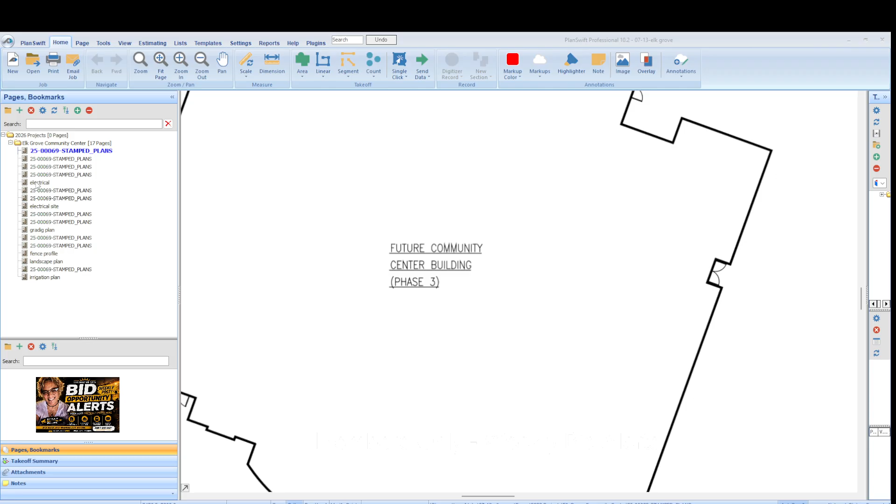So let's transfer over. This is a future community center building, but it's primarily civil work. And so this is a good one, it's very good. So let's look through the sheets that we have.

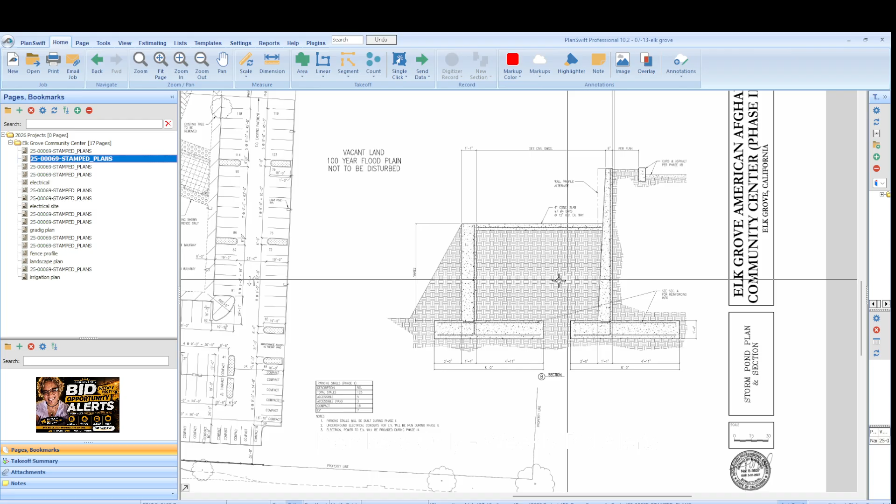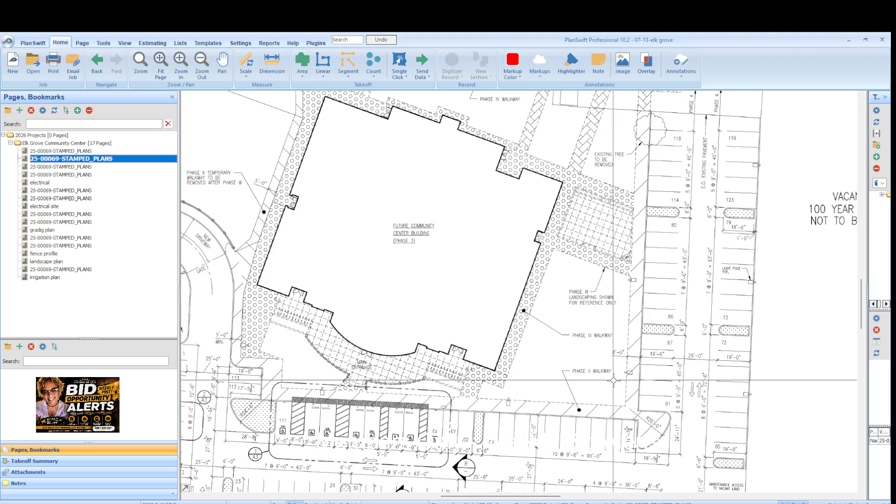So let's take a look at what we have, and this is the site plan. This is going to be new, and what it's showing us is landscape, the walkway, all of the general stuff. If we wanted to, we could do some square footage, some measuring of the lines and the symbols, because each one of these gives man-hour totals, how many letters are there, and it's a man-hour total per letter per symbol.

And what do we have here? Oh, storm pond, that's interesting. So we're going to look at those section views of the pond, which most likely will give us the depth, so we'll know how much to excavate out of that. So that'll be a nice one.

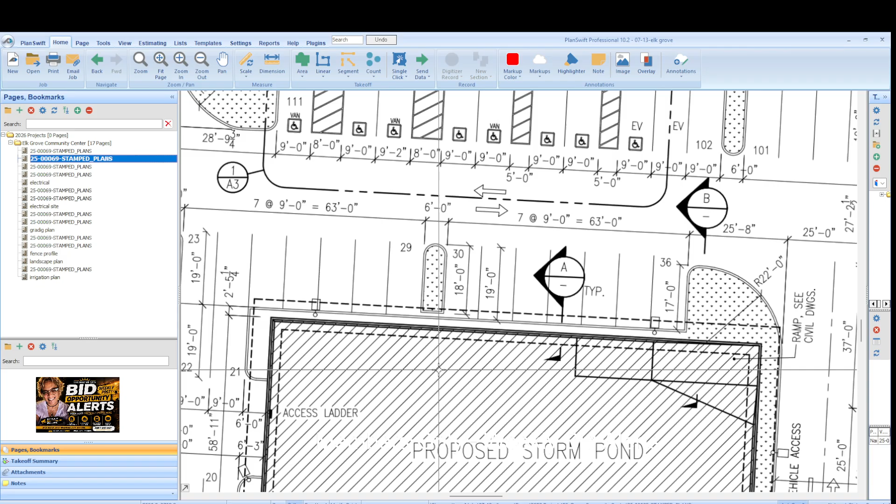If you are a third tier member, you get the full estimate. So again, this is a new portion of a Afghan community center that they're building. We don't have any of the interior, we're just doing basically the civil work, so just giving you some details.

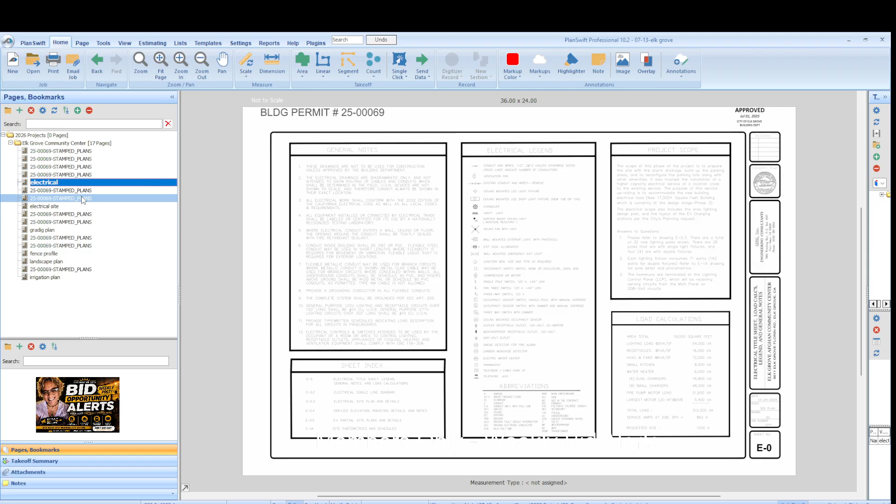And here's the electrical set for the exterior, which I think is really good for an electrician to look at and study. So they're showing us the trench details - this is where our wire is going to go. So yeah, this is a good one, giving us all of our assembly information.

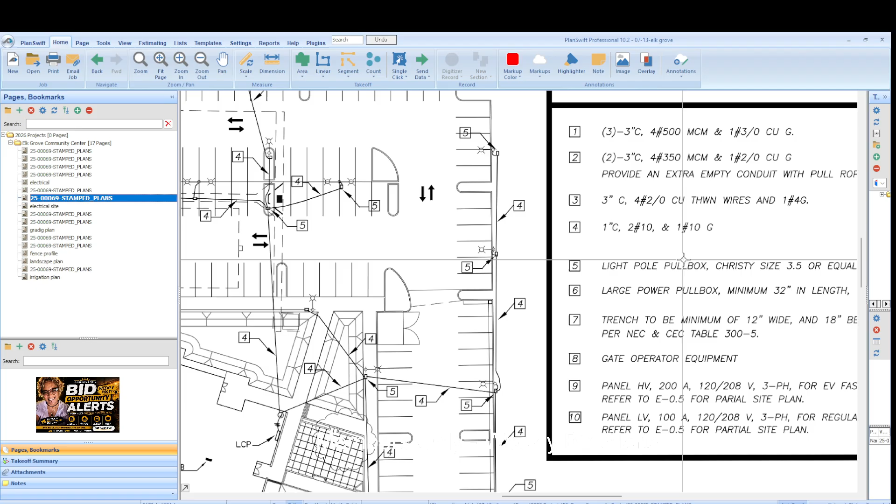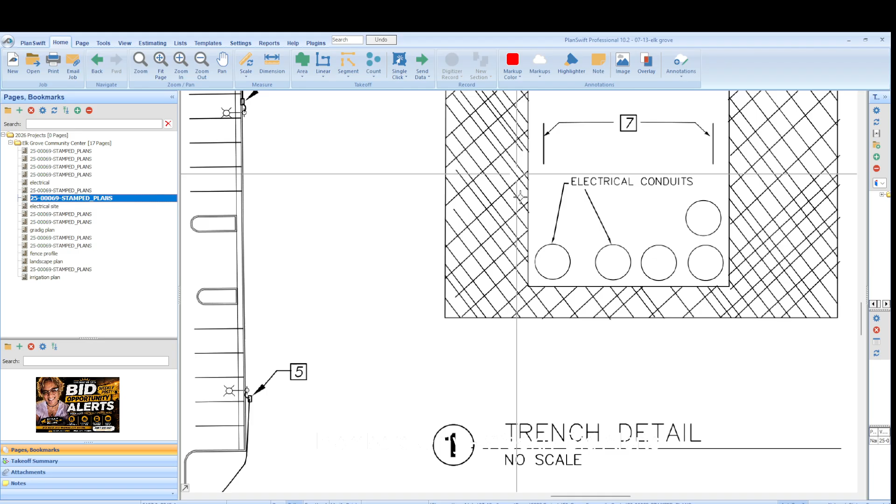We're assuming, unless it's going through concrete reinforced, something we assume, and it would say in the specification. So for the purpose of the estimate, the general rule is most likely PVC unless it's stated otherwise. It is encased in concrete in the electrical conduits, and number 7, 12 inches wide, 18 below the surface, and so on. But with the electrician, are we digging the ditch? Doubt it, but it's important to know.

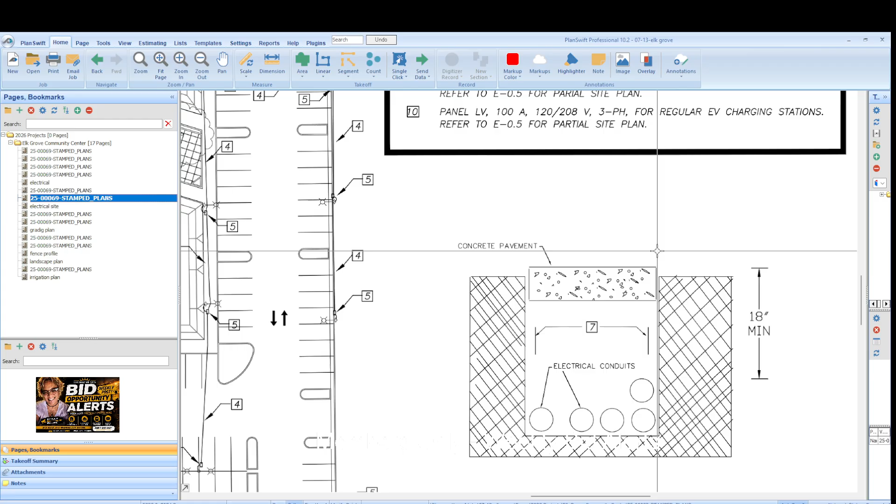And if they ask us to, we'll be able to determine how many cubic yards of dirt, how many cubic yards of this concrete or square feet, however we need to do it. So this tells us a lot - we do need some bedding up underneath it. So it tells us a lot. Again, if you're a member, we're going to go through everything in detail and have all of the numbers. Okay, so here's our equipment.

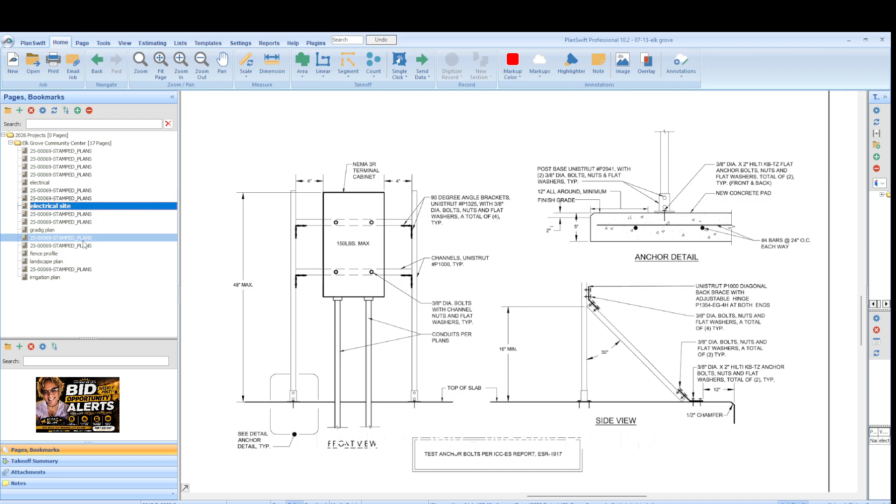Okay, panel, easy. And then the grading plan, which I thought was interesting. So again, this is just our civil set for this new project, and this is what I like.

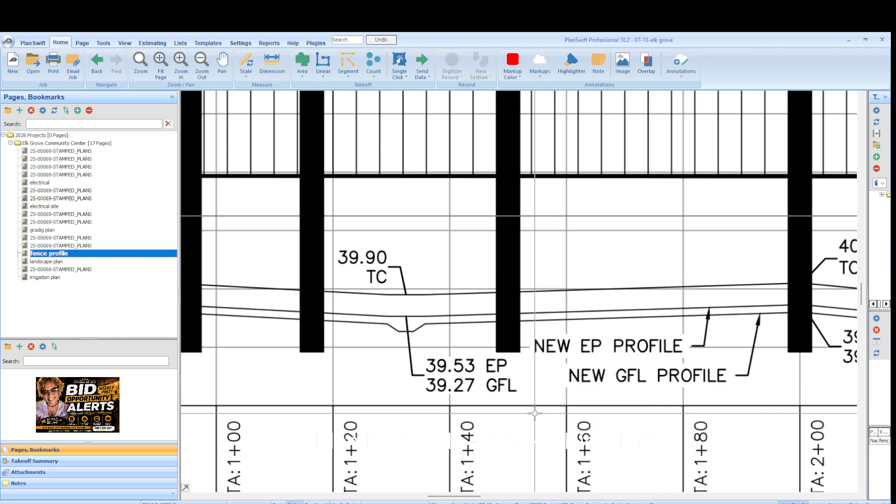Anytime you have underground anything, you want a profile view. And what does the profile view show you? The existing profile and the new profile, meaning the existing top of the curb, existing grade.

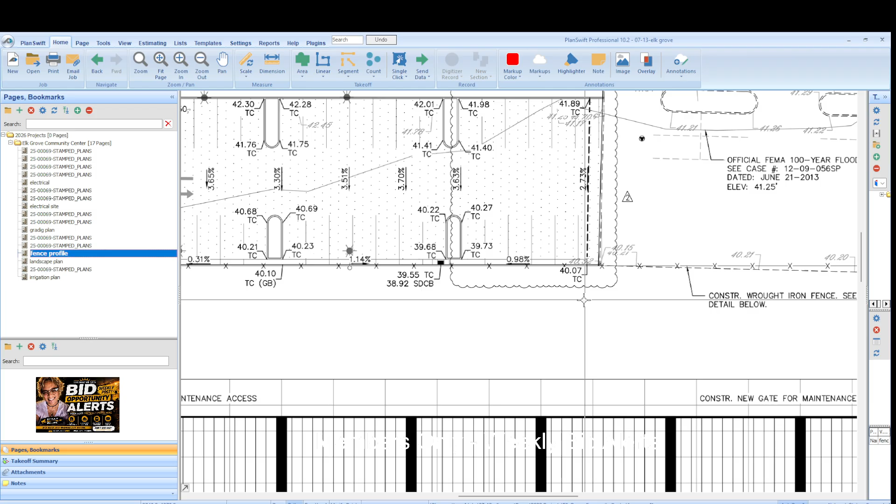Okay, and so you can use this grid to determine, because this is the fence for the new project, here's the fence, right? And each of these locations, which is the post for the fence, corresponds to something here. And so we can determine very detailed stuff like how many cubic yards of dirt do I have to excavate for this and how far.

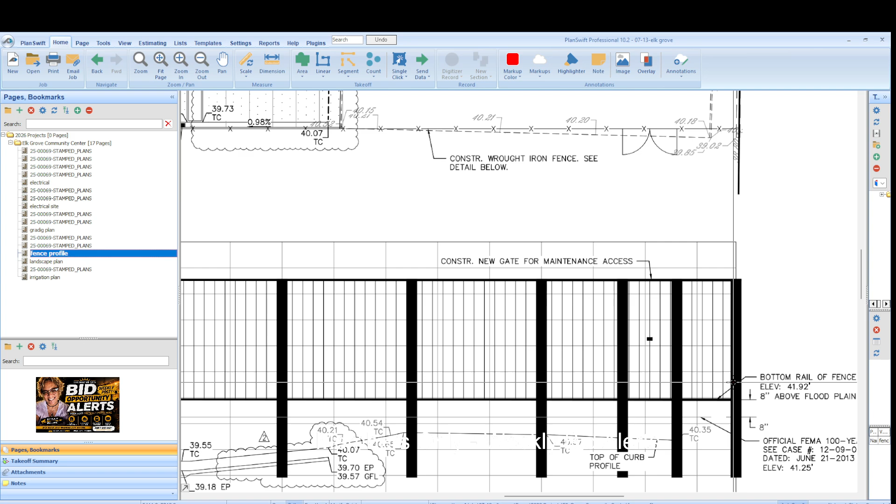See, that's the bottom of the fence. Yeah, so this gives us a lot of information about our cut and fill numbers. You always want to see one of those.

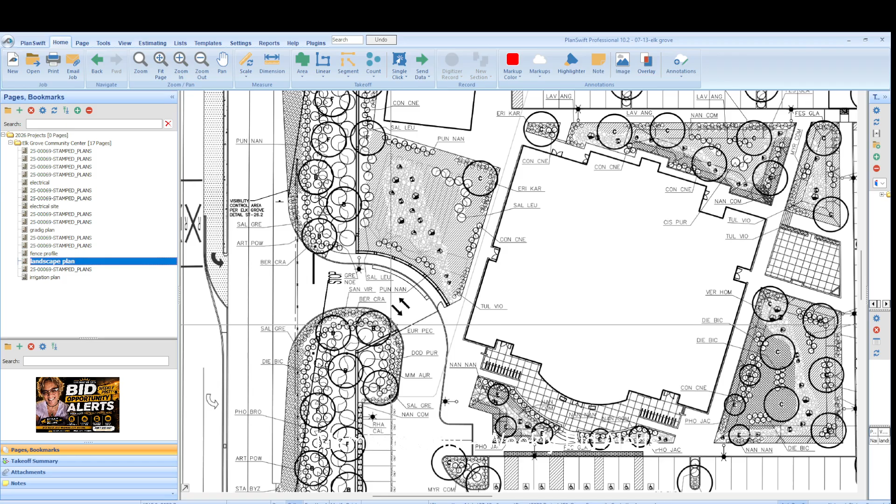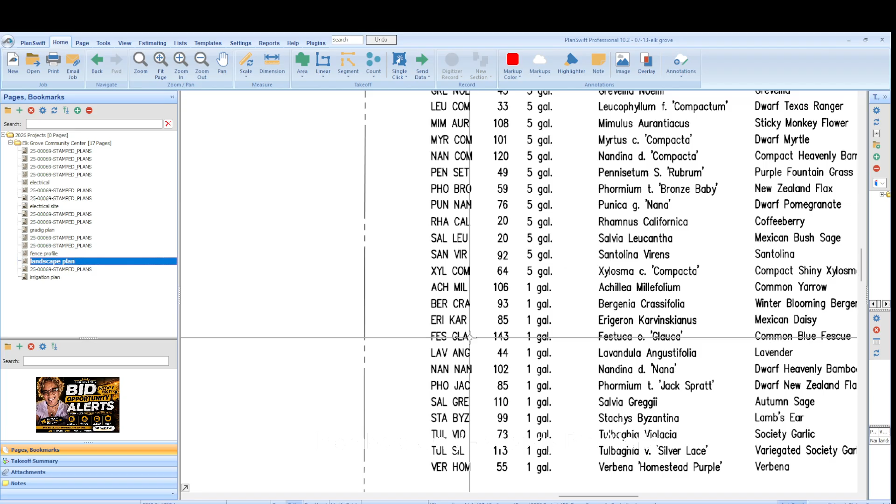And last but not least, our beautiful landscape plan, where these represent the trees, the shrubs, the smaller trees, and they're all represented here by their actual scientific name and what we call them. So what you have to do now, if this is right, that's easy.

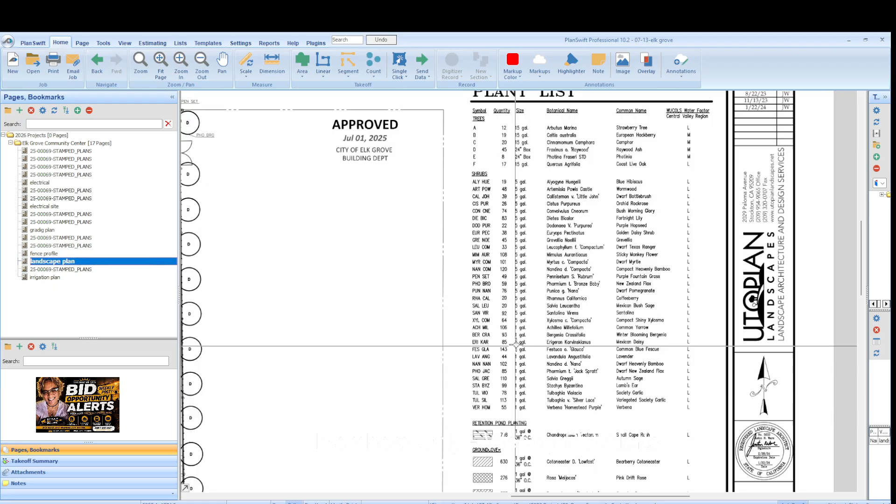I mean, me, I'm kind of weird. I'll go back in the set of plans and actually count to make sure we do have 43, because if you don't, then whose fault is that? Are you supposed to be lazy and go by this, or are you supposed to go by what you see? So, okay, you're not supposed to be lazy.

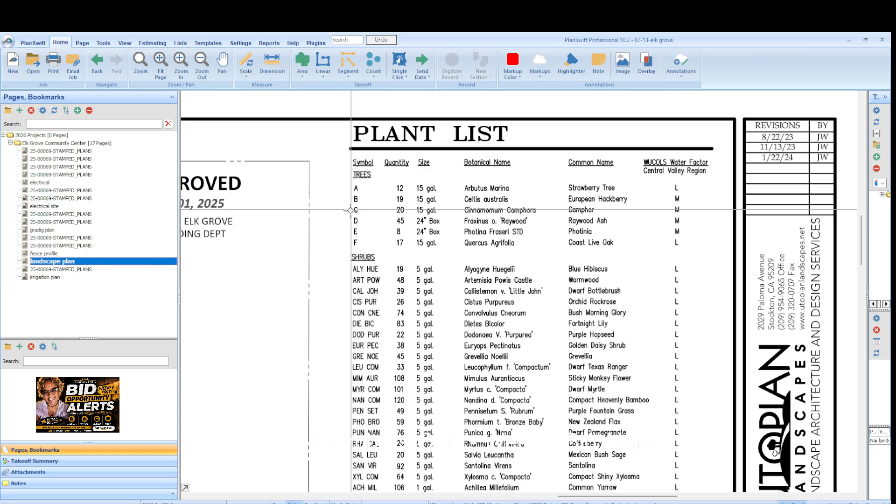Gives you A, B, C, and D, and I don't know how they represent all these other ones. But yeah, you have to try to be as accurate as possible, and that's easy.

And then last but not least, the irrigation plan. Basically, outside underground plumbing for the flowers and plants.

Okay, so again, if you're a member, you'll get all the details and the takeoff, man hours, how we determine that. And in this case, you must have noticed I didn't talk about productivity factors, because this is new from the ground up. There's no access issues because we're going to start literally from the ground up. So we're going to dig out everything, put that in first, drop the concrete and whatever goes above that. And there's no issue.